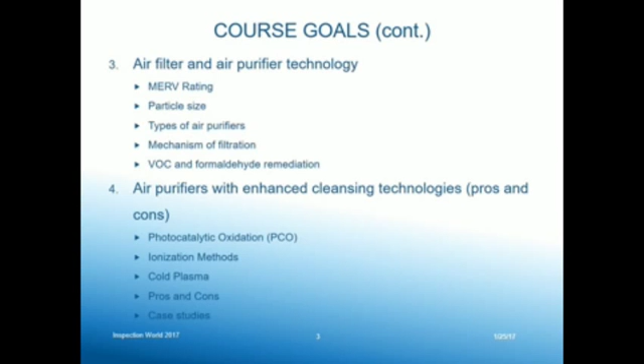Then I'll talk about different air purifiers and air purifier technology, air purifiers with enhanced cleansing technologies such as photocatalytic oxidation, and finally just a few words on shock treatment using ozone. We've got a couple of slides for that and general discussion, more than anything, and then a summary and conclusions.

So within hopefully two hours, you will have an opportunity to understand more about filtration from what I've gathered to know. I'm not an expert in the area by any means, but if you have something to share that would be beneficial to the audience, please do so - I'd be happy to hear those comments.

So what encompasses indoor air quality? Indoor air quality has many, many different aspects to it.

And the one thing that I'm not going to talk about today is radon remediation. It's a very important area, but that is definitely something handled by somebody who's pertinent in that area. But besides radon, first thing we talk about when you're in a room is, are you comfortable? Is it too hot or is it too humid? And so that's one of the aspects of comfort in an indoor air setting.

But then you think about other areas like molds. Are there molds present? Carbon monoxide and carbon dioxide. Typically, carbon monoxide has been under control because of the fact that we monitor for that. But carbon dioxide we less frequently monitor for, and we have some guidelines for CO2 emissions based on ASHRAE recommendations.

And then you talk about particulates, and that comes from lifestyle. You have skin cells, etc. Allergens that could be present that could be impacting indoor air quality. And then finally, particulates that could be present from building processes. And then finally, we have the VOCs, which pretty much is what you are breathing in the room on a normal basis without really even thinking about that. So every room has indoor VOCs, including this room here that we're in today.

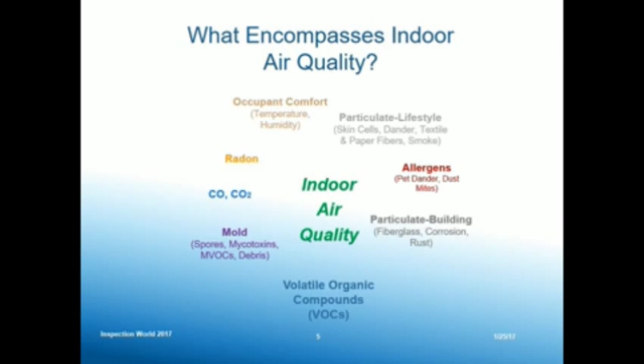So first of all, let's talk about some air quality basics. Indoor air is definitely contaminated with particulates, allergens, molds, and VOCs. In fact, the EPA indicated that indoor air pollution is one of the top 5 environmental issues and health risks that are present in the current day. And so it's something that we need to take seriously.

And so, the more we hear about things like Lumber Liquidators with formaldehyde issues, and where formaldehyde impacts our respiratory system, the more we want to know how we can handle these things and what our levels are. And so it becomes very important. And I think as we go through time here, with some of the assessments that come through, California being our strictest state, they come up with more and more guidelines for different VOCs. And I think there's going to be more and more interest in the future in commercial buildings and in homes for understanding what the VOCs are and how to remove them.

So particulate matter, allergens, tobacco smoke, they can all affect occupant health. And then again, we want to be able to have decent comfort levels for the occupants that are here. So we'll find out that source removal is actually the best method to remove VOCs if you can do that. But we'll get into that a little bit later.

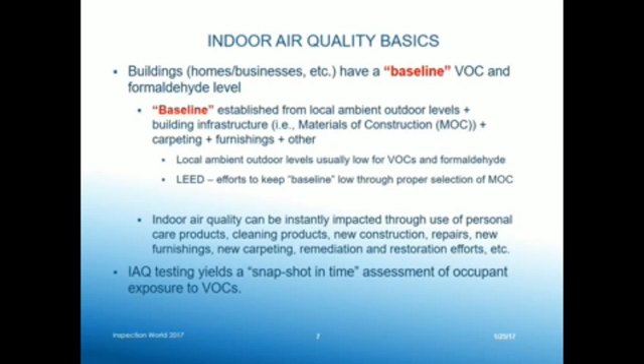So indoor air quality can be instantly impacted through the use of personal care products, cleaning products, new construction, repair products, etc. So IAQ testing yields a snapshot in time. And the reason for these changes can be that there have been more and more VOC issues, and a lot of it has to do with the fact that we have more airtight buildings that have been built, less leakage, and so when you have less leakage, you've bottled up what's inside as well. There are newer synthetic materials that may be off-gassing different VOCs. There's an article, I believe the author's name was Weschler.

He talked about VOCs over the last 50 years, and starting about 30 years ago is when you started having all these VOCs associated with plastic materials being present.

And we spend a lot more time indoors these days, especially younger people. When I was in grade school and high school, I was outside all the time, but now it's the video generation and everybody stays indoors, and it's safer to be indoors in many areas.

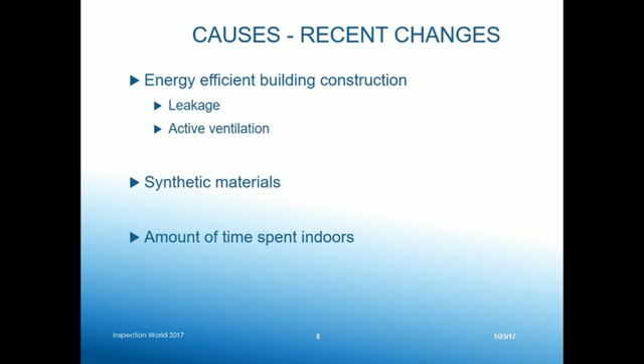And finally, there are increases in respiratory conditions. Visits to allergen doctors are at an all-time high based on our chemical sensitivity to what we're breathing and what we're being impacted by.

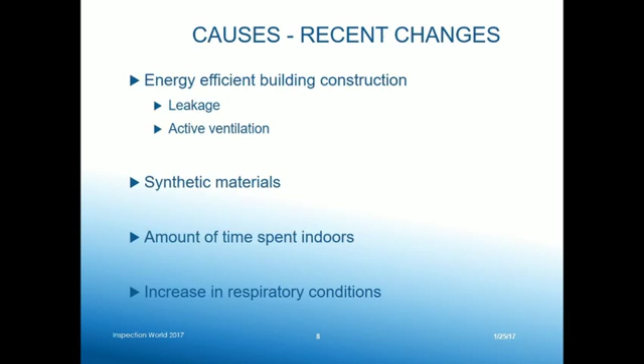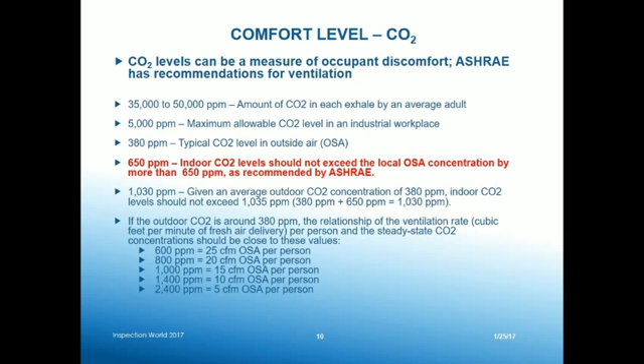So all of this is setting up the dialogue for why we would want to have filtration, keeping that in mind. Comfort levels: the outdoor air level is 380 ppm, and for indoor CO2 levels, I know many home inspectors use handheld monitors for this, and once you get above a certain level, you need to really consider ventilation issues. So I'm not going to speak any more on that.

But TVOC is a general indicator that we typically look at for indoor air comfort as well. The green guideline is to have less than 500 nanograms per liter of your TVOC. And then you have individual compounds that are in there.

The problem is, for homes especially, there are no TVOC guidelines. We generally try to follow, for instance, LEED guidelines, but those are mainly for commercial buildings that are being built. You can have a green home, and they do pretty much use those same kind of standards, but there's really not an actual U.S. standard for what your home has to be. There's no regulation for it whatsoever.

So as far as the methods go, there are many methods for getting a TVOC, and I know many people use handheld monitors, and then also there are air testing methods used by different analytical testing method companies.

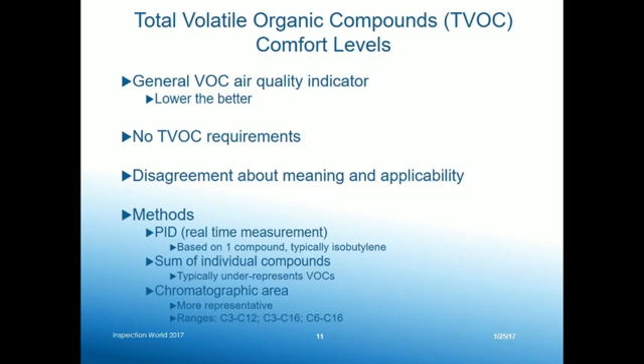So when you think about the TVOC guidelines, the general comfort range - Mølhave is a Danish scientist who studied VOCs and indoor air quality, and he established that you're generally comfortable if it's less than 200 nanograms per liter, which is kind of low.

So typically, when we think about comfort levels, we think of a green building or a green home. You should be comfortable at less than 500. And then, in general, you should be okay between 200 and 3,000 nanograms per liter, but there are some elevated VOCs that could cause you problems.

So if you're in that range, and let's say you just had some plastic lined pipe put into your home, well, the tetrahydrofuran (THF) from the PVC cement is going to be fairly high in your home. That's a respiratory distressor. So you might have some issues of discomfort based on a new application of building products.

Once you get above 25,000 nanograms per liter, though, you're kind of in a toxic range. Even though OSHA levels are still hundreds of times higher than that, you don't want that kind of a level of TVOC in your home or in your business. So things start becoming very uncomfortable for people.

300 nanograms per liter can be reasonably achievable, but again, we've found that the average home, based on all the different habits we have with personal care products, alcohol, those wipes you use for hand sanitizing, etc., from 8,000 homes, averages about 1,900 nanograms per liter.

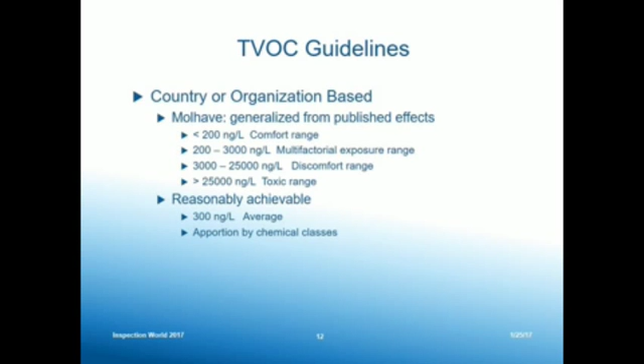And then again, I mentioned the green building being 500 nanograms per liter of what people are trying to achieve, with formaldehyde levels less than 37 nanograms per liter.

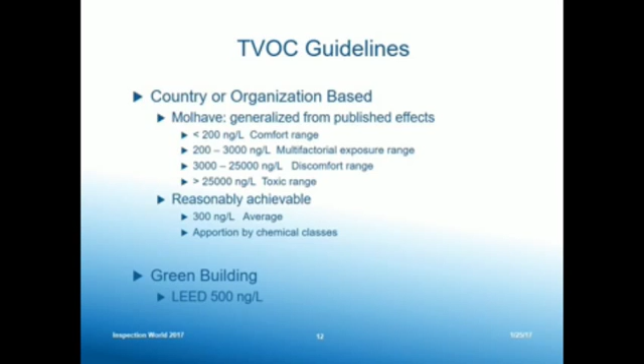So what are the sources? Well, for buildings, it's the building materials, the wood products used. Paints and coatings are very high. They take a while to decay.

There's this misconception that low VOC and no VOC paints don't have VOCs. Well, that's just the official federal government definition of a VOC - any organic compound that will interact with the outside atmosphere to create products detrimental to the ozone layer and environment. This includes things like xylenes and toluene. So what paint manufacturers do is replace those with glycol and glycol ether materials that are lower in vaporization characteristics, but they take a lot longer to off-gas. They're still considered VOCs, just not under the federal government's VOC definition. So we find that quite a bit.

We also have adhesives, mastics, and cements used in building products and roofing materials, and these can remain for years and slowly off-gas over time.

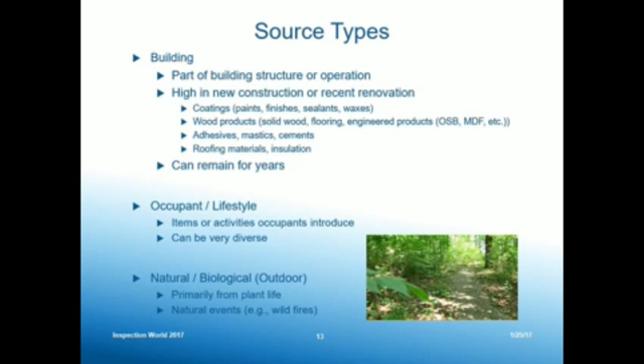And then we have occupant lifestyle, and then outdoor sources. Outdoor isn't much of a contribution unless you're in an area with a lot of spraying. We typically see issues with spraying outdoors around your base foundation, with the fuel carrier coming in through the windows, so it can become a problem. You can also have VOCs from wildfires.

As I mentioned earlier, we have baselines, and that baseline can be elevated by your lifestyle. You could put in mothballs or moth crystals for pests, and those are also used in urinal cakes in restrooms and bathrooms. Then there's paint and all kinds of coatings that come on new furniture. Kerosene, diesel, and fuel oil - if you have an attached garage with those vessels, they're going to creep into the home as well. So in general, there's a lot that can come into your home without you even being aware.

When you go to the gas station and then go home, you've just introduced gasoline vapors from your clothing into the indoor air. Especially as a home inspector, if you go take a test, make sure you haven't come from a gas station first, because you could be contributing to the homeowner's VOC test with gasoline vapors from your clothing. So be very careful about what you carry in. It's kind of like what Jeff May was saying yesterday - don't look in the attic or basement first when looking for mold, because you'll get some on your clothing that could then contribute to the indoor environment in the main room.

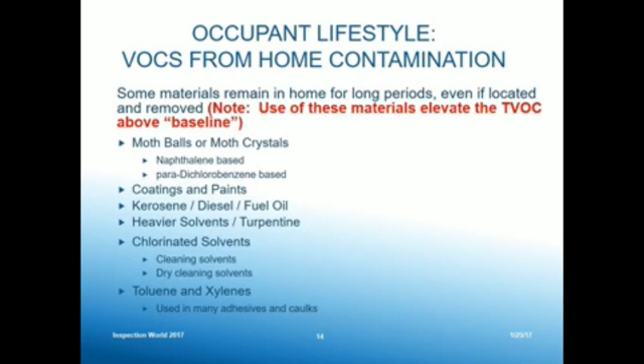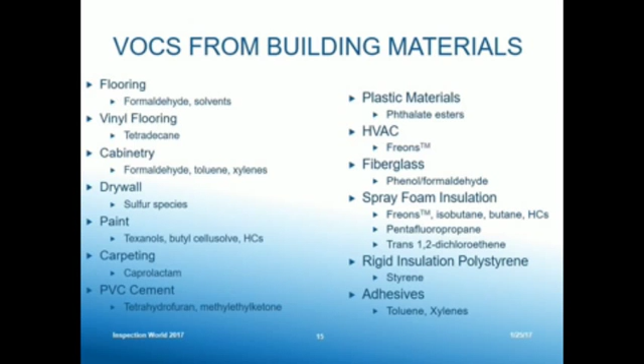And then finally - I'm not going to exhaustively go through this - but this is just a variety of different VOCs that can come from different materials of construction, from building products that are used. So every time you do a renovation in your home, you're introducing a whole new level of VOCs.

And then there's formaldehyde. Formaldehyde comes from any kind of wood. If you send a sample to be analyzed for formaldehyde, you're going to get formaldehyde from it - doesn't matter what kind of wood you have. It's going to produce some level of formaldehyde if you heat it up to, say, 50 degrees C. Formaldehyde naturally comes from cellulose degradation, and it's in the wood. It slowly off-gasses over time, and can off-gas differently in different temperature and humidity conditions. So formaldehyde is always there.

But it's even worse when you have poor materials of construction from other countries, for instance, that use particle board for cabinetry inside. It looks really nice on the outside, but they use cheap particle board on the inside, or oriented strand board, known as OSB. So plywood contains formaldehyde, but outdoor levels for formaldehyde are 5 to 15 nanograms per liter depending on where you live. NIOSH set a limit of 20 nanograms per liter as what you should be exposed to. Well, your home infrastructure is going to add more than that to the already outside air of 5 to 15. So we find that a normal home has an average of about 50 to 70 nanograms per liter of formaldehyde already there. And when you put in flooring that contains wood, adhesives, etc., you're going to add to that.

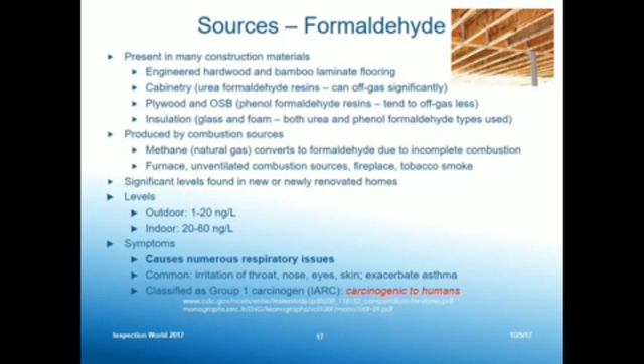And one other source of VOCs that a lot of people don't think about is vapor intrusion, which comes from contaminated soil due to spillage or from past industries that were in that area that leaked into the ground, and then that's now coming up through people's foundations into the home. So something to always keep in mind. Know the area that you work in, whether or not there are any of these locations where there could be an issue involving soil vapor intrusion.

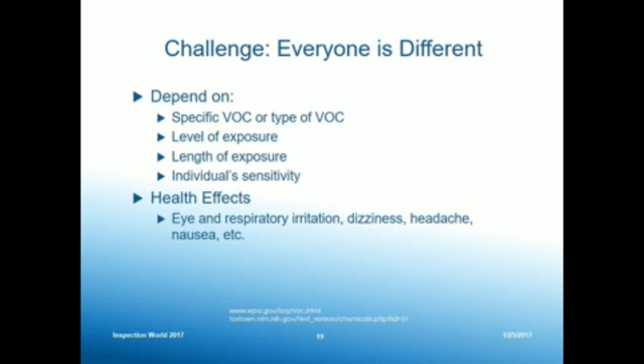So it's a challenge to everyone, though, and health effects can vary from person to person. Odor thresholds vary from person to person, but it all deals with what we're breathing on the inside. But other than VOCs, we also deal with these other areas I mentioned earlier. So just briefly, I'm going to touch on particulates, which include dust, dander, and pollen, because we have to worry about how we're going to deal with that with filtration as well.

So what is the concern with particulate matter? It's microscopic, and the fine particulate matter you sometimes hear referred to as PM, particulate matter. And it's the fine material, 2.5 microns and smaller, that causes our biggest concern, because those particles can embed deep in your lungs when you breathe. And that's the stuff you really need to worry about. That's not coming back out right away.

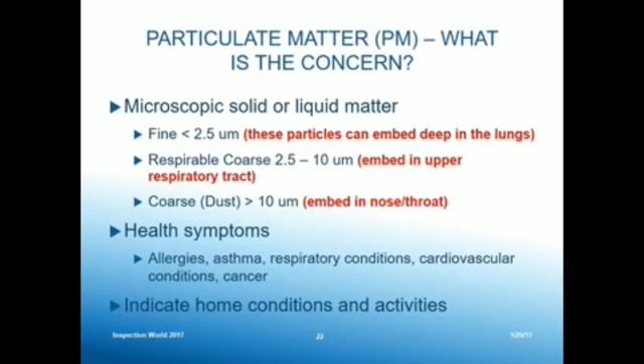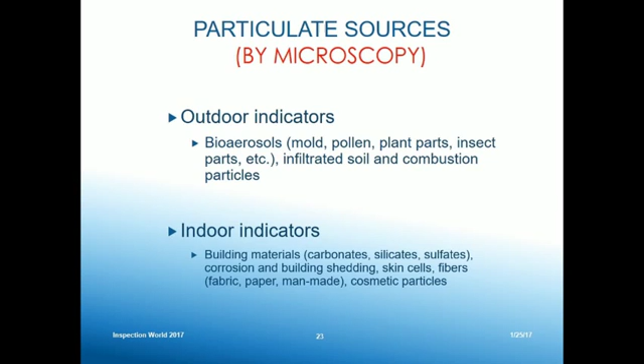So we have outdoor indicators, and most people refer to a microscopist for looking at particulate matter. The outdoor indicators include bioaerosols, which include mold, pollen, plant parts, insect parts, and we also worry about infiltrated soil and combustion particles. Whereas indoor indicators are from building materials such as carbonates, silicates, sulfates, skin cells from people, and then fibers, dust, and dander from pets, cats and dogs. And then these are, again, a couple of examples of the, yes.

Oh, do you mind using the microphone? I'm sorry. Thank you.

Besides the issue of the dander with the pets, we also have the clumping cat litter and things of that nature. What are the gases off of that from the clumping, or from the fact that you can't smell the cat pan anymore? Is that a concern, or what contribution does that make? Yeah, urine odor, especially cat odor, is a really hard thing to identify in a mass spectrometer, for instance, because it doesn't like to go through a GC column very well. So we have an issue with that.

But for some reason in our home we have our cat litter boxes right by the furnace. So it's kind of ridiculous. But you do get the dust buildup. I don't notice the odor as much because I usually try to keep it clean every day. But definitely you have a dust buildup, and when I look at that dust, I think it looks like it's less than 2.5 micron when it's being emitted. So to me, it's an issue of going through the home if you have it real close to the furnace, especially. This particulate matter could go through. But otherwise, I haven't heard any health issues associated with the cat litter, other than the fact that I know the dust is there.

Have you heard any issues? Okay, and he replied no, that's why he was asking. So if anybody else has any further information on that, feel free to share it, please.

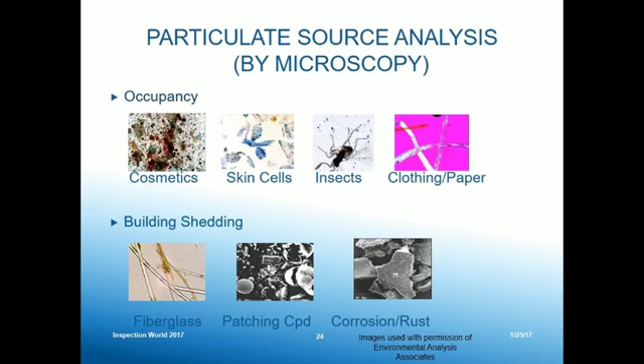Thanks. All right, thanks, Shannon.

And then we have microbial sources of VOC, or not VOCs, but microbial sources. These are single living organisms, viruses, bacteria, molds, and these can travel throughout the air, a lot of times on air particles or particulate matter. And sometimes just a simple sneeze can carry viruses a long way. So it's something to be aware of as far as microbial. So again, all these will be talked about when we talk about the air filtration processes.

And the concern for mold, of course, is potential health effects. And Jeff May yesterday indicated that some molds indoors will cause damage to your materials of construction and others won't. I'm not going to go into details on which will and which won't. I think his slides are available online. And there's no real practical way to eliminate all molds from the indoor environment, though, because molds are prevalent outside.

Usually they're not as prevalent in the winter and when it's cold, but as Jeff pointed out yesterday, you can grow mold in your refrigerator on food. So molds still grow in the cold. So you just have to be aware of that. But moisture control is the key. For mold to grow, you need nutrient, moisture, and temperature, and that's the way a mold will grow. So if you can control the moisture and then the temperature, then you're doing well on trying to at least control the mold growth. And there's no official limits for mold or mold spores.

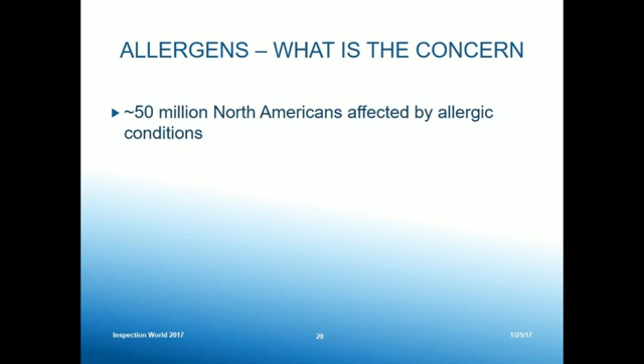For allergens, it affects more than 50 million Americans every year, and it's getting worse. It's an immune system overreaction to certain substances. A lot of people are now chemically reactive, so they're more VOC reactive than they are to any other type of allergen. And you can get a chemical sensitivity immediately from some adhesives that will then carry over to other types of VOCs that are similar in nature. It can be a very severe problem with regard to essentially the human condition.

And then we have allergens like dust, ragweed, pollen, etc. that we can have present. And again, it's on dust, so if there's dust in the home and that gets swept up through air movement into the environment, it can be very costly for some people. I've sat there at a kitchen table before with a really strong sunbeam coming in, and you just wipe your hand across the table and you can see the particles floating up into the air through the sunbeam. So it's something that we all need to be aware of.

So now these are all the sources. So now we can start talking about the filtration process. At this point in time, does anybody have any questions with regard to the VOCs, the sources of these allergens, or anything like that? All right, I will carry on then.

So again, the best possible thing that you can do is remove the source, if that's possible. If you can remove the source, then you've eliminated the problem. But in general, that usually ends up not being a practical thing. You're not going to remove the walls from your home to get rid of paint and coatings VOCs. You just can't do that. It's not practical. Now, you can use the lowest VOC type of paint possible, and that will help eliminate or reduce the amount of materials you have, but there's really no way to remove it all sometimes.

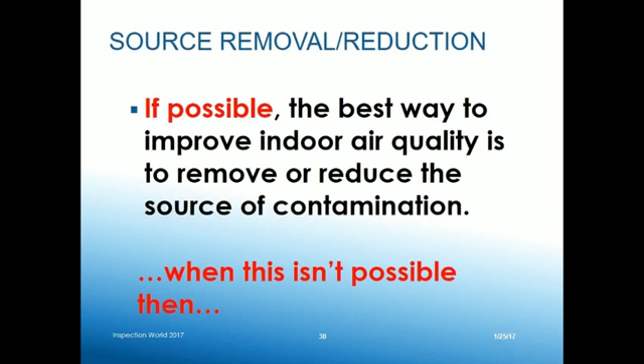When this isn't possible, then the next best thing would be to improve ventilation and add some fresh outdoor air. That's not always practical either. It may be very cold in your region, or it may be very dirty air in your region, and you don't want to bring in fresh air from outside. But that is a good way to help at least mix up the VOCs in your home with fresh air and dilute the effect of those VOCs on you or the occupants of that home.

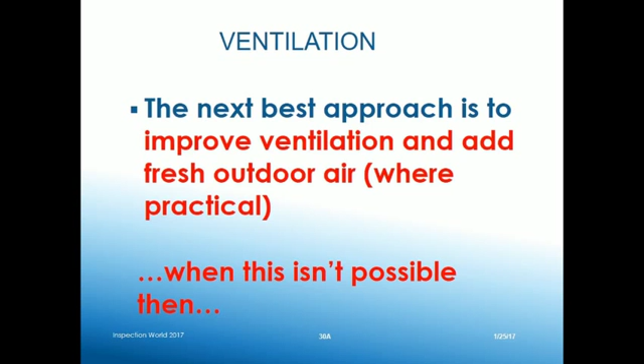When this isn't possible, that's when we start turning to looking at filtration and air cleansing. Okay? So what we look at in this particular portion of the talk are filtration types. What type of filter could be appropriate for different particle sizes? How can you filter VOCs? And finally, what other types of air cleansing technology are available?

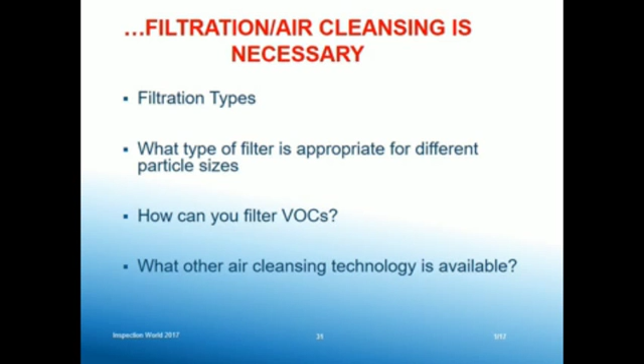So when we improve indoor air quality, again, I just mentioned the source removal, reduction, ventilation improvements. But then we're going to talk about the air cleaners and air cleansing. So air cleaners can be installed in the HVAC for whole house conditioning, which can run anywhere from the $2,000 to $10,000 range or higher, depending on the size of the home or business. And in general, this talk is more for home ventilation, because commercial ventilation has a whole different concept that uses similar principles.

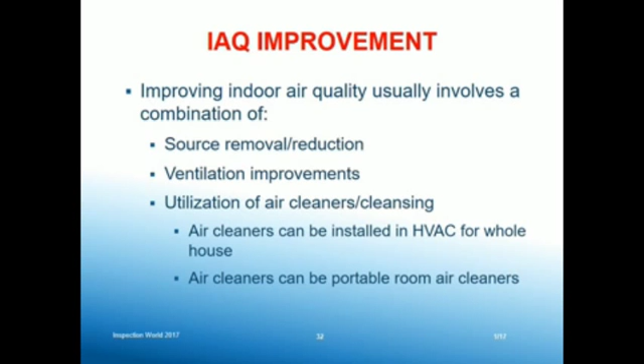And then air cleaners can also be portable room air cleaners. And I recommend portable room air cleaners a lot for people, especially when they're in their bedrooms 8 hours a night, and that's where their problem occurs. Look, put in a room air cleaner that can help to reduce the VOCs that are present, or allergens, or whatever it is that's causing the problems for that individual.

So regarding air cleaners, they have primary and secondary impact. And what I mean by this is that the primary is that you are potentially reducing the contaminant concentration, okay? But secondarily, what a lot of people don't realize is that you're also using a lot of energy in the process. So as far as the overall energy use, and how are we affecting our environment? You're improving your condition on the inside, but you're also using more energy. Then you also have possible byproduct production from the air filter, air cleaner that you're using, and that is what I'll discuss later. But that's just something to keep in mind.

Another thing, there's a common misconception that you will always improve your air quality using an air cleaner. And that would be the case especially when you first put a filter in, you're typically improving your air. But it turns out that if you let the filter get clogged up and you allow that to continue to run, then you're going to reduce airflow. You're also going to reduce the turnover of VOCs in your home, or the turnover of fresh air in your home, and you're going to impact your indoor air in a negative way. So you have to be careful about thinking that an air cleaner is automatically going to help. It sometimes, depending on how you handle it, could be a deterrent.

And depending on the air cleaner that you use, VOCs may not be removed, because some of the basics that we see in the stores don't remove VOCs. And then from the ones that we do use that do remove VOCs, we have to be careful about the secondary byproducts that are potentially returned into the air from the cleansing technology.

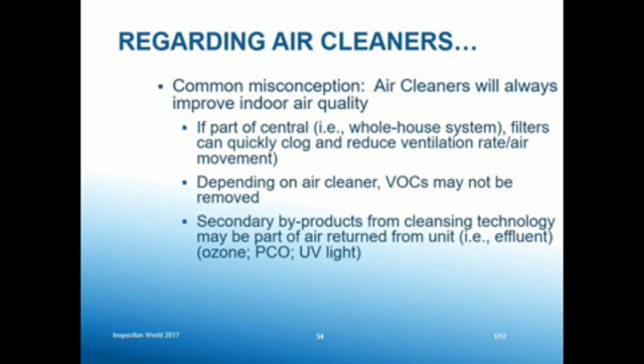And by the way, just so you know, in preparing this talk, I did not use any jargon from any vendor. I did not use any names of any vendor, as far as I can tell. And I've tried to be very objective about what I'm discussing here with regard to that. So I'm not really making negative statements about any one individual. I'm just saying these are some of the potential pitfalls or the advantages and disadvantages of a particular type of air filter or technology, just so you're aware. Just trying to keep it as scientifically objective as possible.

So there are two types of air cleaners that can remove particulate matter, but these do not deal with VOCs. But a lot of what we have in homes right now are mechanical air filters, such as HEPA. HEPA stands for High Efficiency Particulate Arrestance. So you're trying to arrest particulates from your home air. These are limited by particle size, and we'll see that information a little bit later.

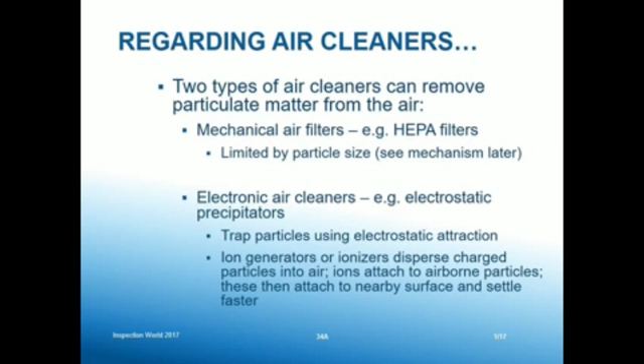But electronic air cleaners, such as electrostatic precipitators, they sort of charge the air, so the particulates are charged, and then they get captured by an electrostatic filter, or they essentially fall onto a surface and get removed from the air. When they're removed from the air by falling onto a surface, then you need to make sure that you're not mixing that dust up by walking through with air movement. So they trap particles using electrostatic attraction, or they produce ions which attach to airborne particles, which makes them fall out and settle faster. But neither of these types of air cleaners can remove VOCs, which have much smaller molecular sizes. So we're going to talk a little bit about that here in a minute.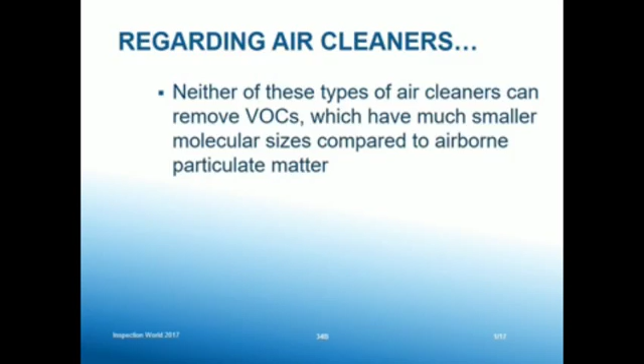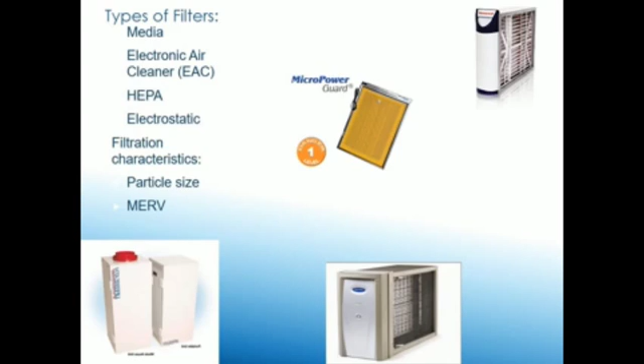And then we look at what's known as the MERV index for an air cleaner. The MERV index is a rating of how well it performs with removing particulate. It stands for minimum efficiency rating value. And the higher the MERV rating is, which goes up to a number of 20, the better the effectiveness of the air filter is, and the greater the number of dollars you spend on it.

So most indoor air quality for homes is 13 or below, but the ones that are 20 are for clean rooms and hospitals and laboratories where they need to have a clean room, and you wouldn't use those for your home anyway, but that's what that is. They will arrest contaminants less than 0.3 micron in particle size.

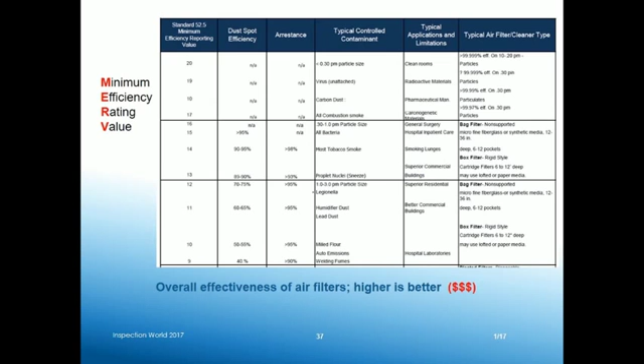When you get into the range of 16, you're talking about 0.3 to 1 micron particle size. And then 12 is 1 to 3 micron PM particle size. And then it goes all the way down to 1, and this is using carpet fibers, which is not very effective at all at cleaning air.

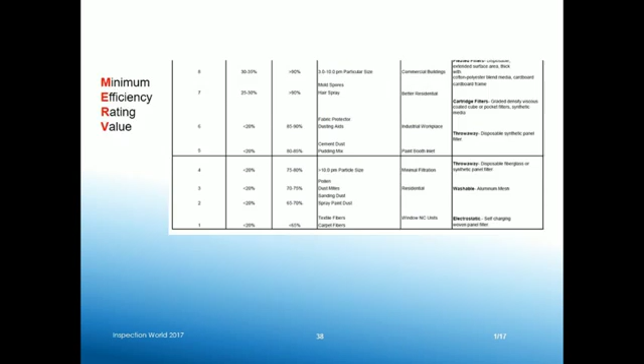So the ones that are most commonly used in homes are from 6 to 13. And you can see the superior ones for residential homes are about 13 MERV rating, and these are pleated filters. They do not capture VOCs, but they're very effective in the particle size of 1 to 3 PM. So they do capture part of that respirable PM that we talked about being dangerous to your lungs, but anything below 1 micron, it's not going to capture.

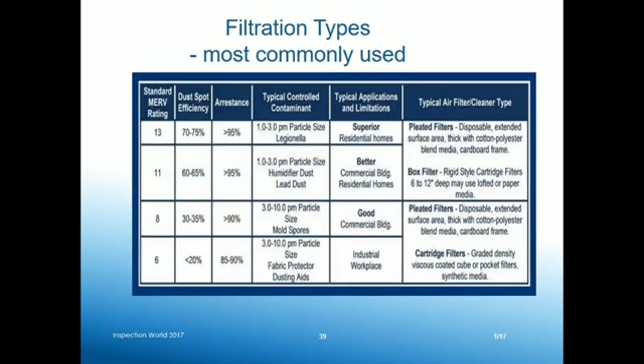So the cost, I looked up some costs today from nationwide building product stores, such as Home Depot, Lowe's, etc. The allergen reduction furnace filters, which are the higher rated ones for homes, have a MERV rating of 12. They're electrostatic, and I'll explain electrostatic in a few minutes. They have a 3-month lifetime, and they range in price from $25 to $40 apiece. So they're on the expensive end for these types of filters.

And then the basic pleated MERV rating of 5 is $4 and up. And that's pretty much what's in my furnace at home, I hate to say. So anyway, these are just the common filter types.

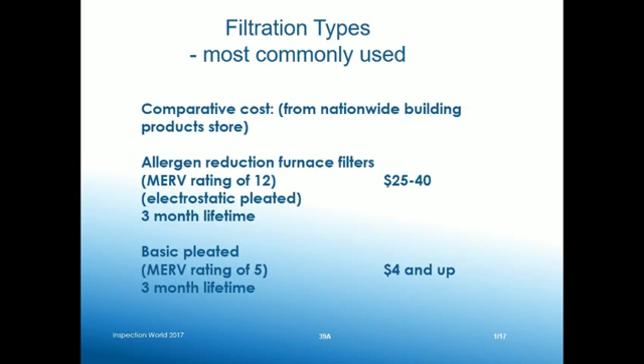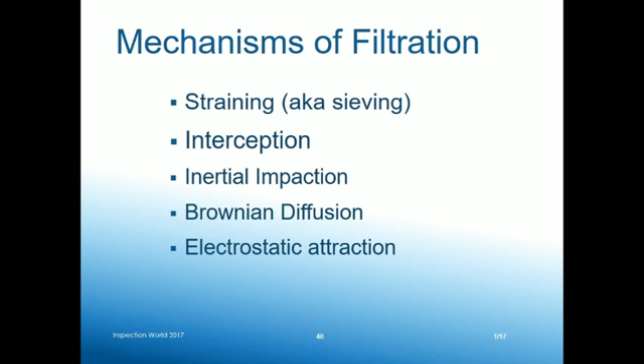And there are different methods for filtration. You would think that the only thing that happens in a filter is that the particulate matter comes in and gets intercepted where it can't get through the fiber, but that's not always the case. So straining occurs for particles that are larger than the distance between fibers, and this is what we normally think of when we think about air filters. There's no choice but to be stopped, and that looks like this.

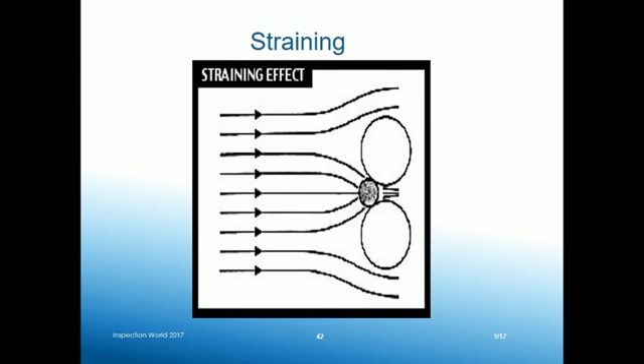Here's the air flowing in. Here are 2 fibers. The particle's larger than the distance between the 2 fibers, and it gets stopped. Well, if you have this happen often enough, you're going to clog up your filter eventually. So that's why you need to change your filters. And that looks like this when you're doing the straining. It just stops. It's there.

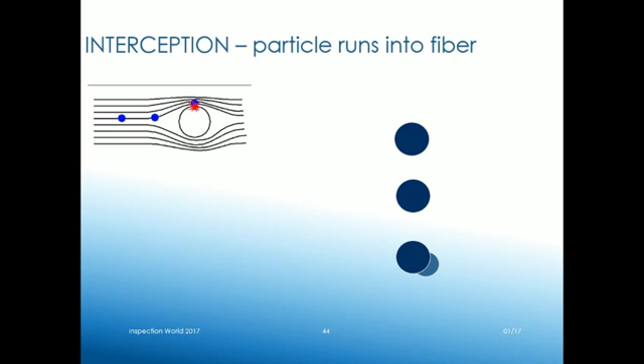And then with interception, it runs right into the fiber, and the picture up here shows it going around the fiber, and it kind of collides with it and hangs onto it. A lot of times that hanging onto it is due to maybe an electrostatic attraction between the particle and the fiber as well. And then we have inertial impaction, which just runs straight into a fiber, and that's it.

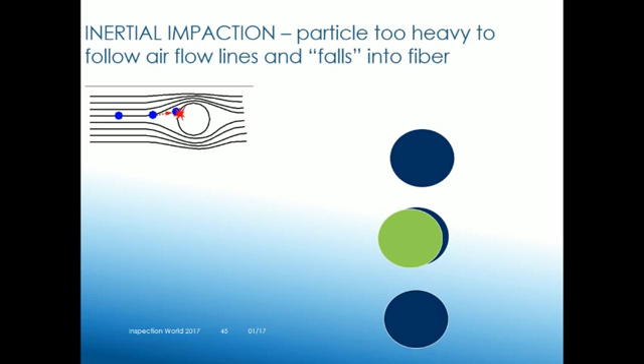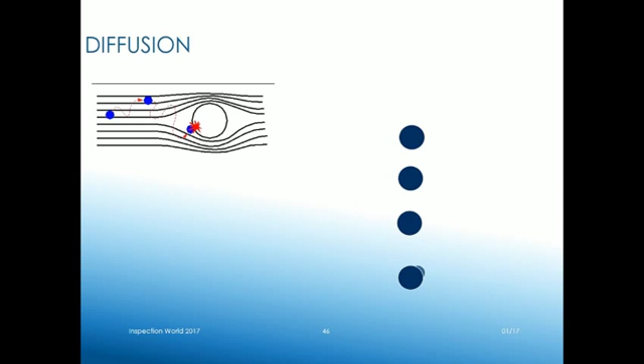Or because it's so heavy, as it's trying to go around the fiber, it just runs right into it—that's inertial impaction. And then finally, there's diffusion, which occurs usually with smaller molecules that go around and then hit a particle or fiber and stick to it. So this is a summary of those: sieving, interception, inertial impaction, and diffusion.

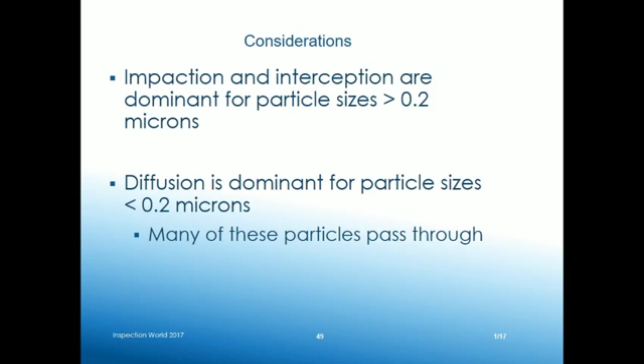Usually for anything greater than 0.2 microns or bigger, impaction and interception are the prevalent mechanisms. But below that, diffusion is dominant. In the process of diffusion, many particles pass through, and the filter is ineffective at capturing them. So in general, this would be an example of a single stage—a single-stage filter.

So the dirty air comes in on the left-hand side, through this pre-filter, which is normally disposable, and then you go through a fabric filter cover, which is also disposable, and then it goes through the HEPA filter. Only a few of the air particles, the air molecules, come through, and the HEPA filters themselves get clogged over time and have to be replaced. But that would be a HEPA filter that's only taking care of particulate matter for the most part.

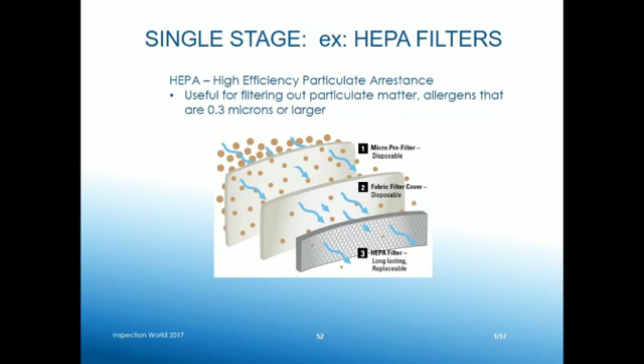And then we have—sorry, my clicker—the air filter with electrostatic filter. The way this works is that unfiltered air is passed through a pre-filter, which you can remove like any other, capturing the big stuff first. Then there's an ionization section where it positively charges the particles. Those positively charged particles are then captured on collector plates, and the collector plates have to be cleaned frequently to make this work effectively.

But as the collector plates fill up, when the air passes through the final filter, you get clean air coming out the other end. These are all still considered single-stage type filters, dealing only with particulate matter. This particular one, with charging, can help deal with allergens and bacterial materials because it helps remove those from the environment.

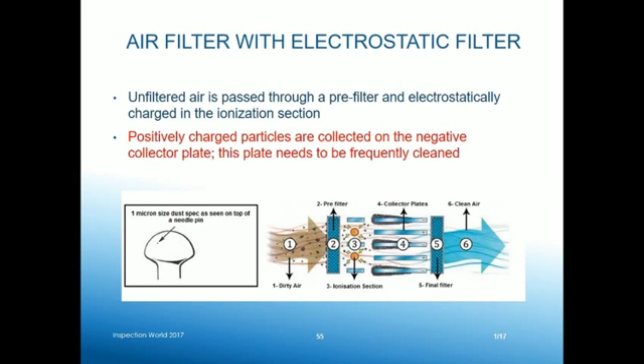But what about VOC and formaldehyde removal? What do we do about that? With VOCs and formaldehyde, the gaseous pollutants require that some kind of adsorbent material be present—whether it's activated carbon or some other adsorbent material, it has to be present for this to work. It's difficult to compare different adsorbents because guidelines don't yet exist for these types of VOCs. The ASHRAE Committee 145 is developing guidelines for HVAC installed systems, but not for room cleaners yet—so they're working on that.

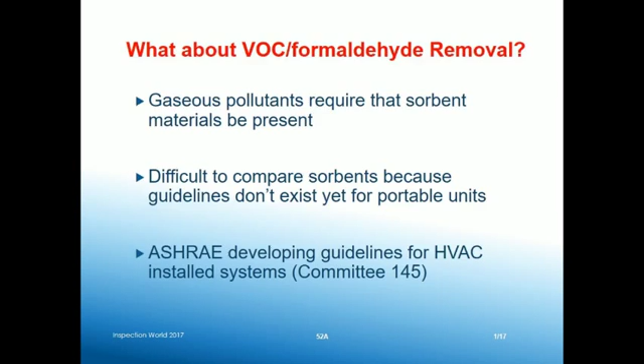So the one-stage method of filtration we talked about dealt with particulate matter, but for two-stage, you want both your first stage and then an activated carbon filter or some adsorbent material to remove particulate matter plus some VOC remediation. It comes down to understanding how that VOC remediation works. In the enhanced two-stage—that's on another slide later—so that's one way of dealing with VOCs.

And then what about airborne viruses, bacteria, and molds? How can you remove those? That's the enhanced two-stage, which includes everything we've already talked about, plus some kind of cleansing technology, whether it be electrostatic, UV (ultraviolet), ionization, photocatalytic oxidation (also known as PCO), ozone, or cold plasma. Those types of technologies currently exist for helping to remove VOCs, bacteria, molds, etc.

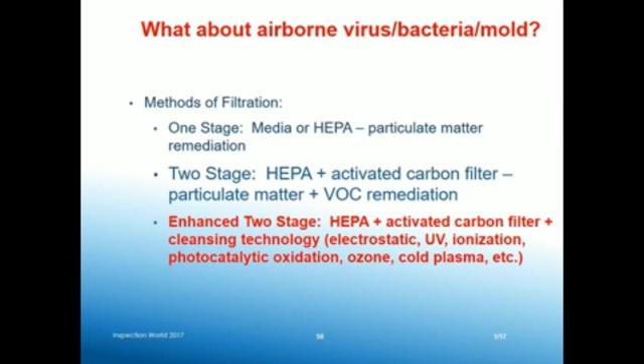So these are different air cleaner types, and I just highlighted the media filtration is what we've already talked about. And then we're right now talking about adsorbents, which involve organic and inorganic gas phase contaminants. And then the photocatalytic and electronic air cleaners and ozone we'll talk about a little bit later.

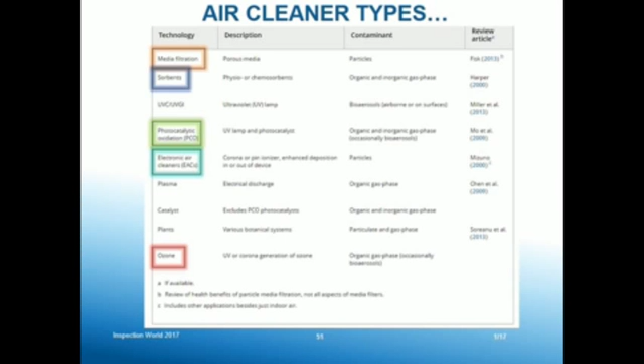But the thing to keep in mind is that all of these different types of air cleaners are currently available on the market. And I always say, just make sure that everybody understands what it is you're buying before you buy it, and understand what the potential advantages and disadvantages and the pitfalls are for these.

So with single-stage filters, we talked about the fact that we cannot capture VOCs, and so that's why we're now talking about VOC adsorbents. But I put up one more particulate size. Here's 1,000 up here, and here's 0.01 for some of our particulate matter. And formaldehyde has a diameter that's 100 times less than the smallest particle on that scale. So formaldehyde has a diameter of 0.0001 micrometer, and that's the smallest organic molecule that we know.

And so then there are VOCs in the range from 0.0001 up through probably 0.01 as far as what we capture on VOCs. So VOCs typically are too small in diameter to be trapped. They don't get trapped by electrostatic attraction. They need to have an adsorbent present for that to work. But again, remember, the best thing is source reduction and source removal.

If you understand what the source is, if there's a gas can in the garage, you build a shed outside and you get rid of the gas can from the garage and you just remove the source from your indoor air. This is if you can't remove it and you want to help your indoor air quality for people that you are dealing with in your home inspections. That's why you would use a carbon adsorbent filter for that.

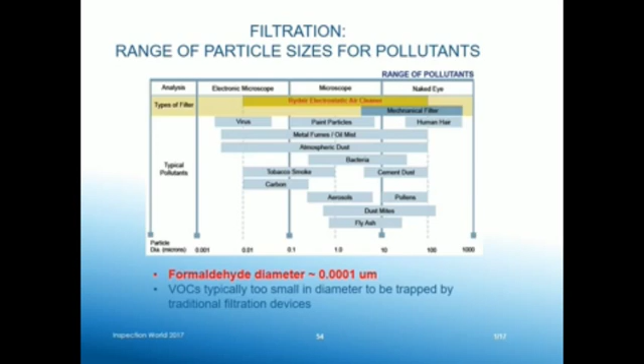Sorry, this thing is like moving on me a lot.

So for VOC removal effectiveness, if air is screaming through your filter too fast, then you're not going to effectively remove anything. So it depends on airflow rate, velocity through the adsorbent, and the concentration of the contaminants. If you have too high of a concentration, you're going to essentially use up the carbon bed adsorbent. These carbon bed adsorbents are a fairly thin layer, but some have been known to have as much as 600 square meters per gram of surface space.

Think about 600 square meters of surface space, because you're essentially capturing through all the little pores of the carbon, et cetera. So there's all this space available for adsorption. You just need to make sure that you're not letting it go too long or that you have too high a concentration of VOCs for it to be saturated immediately. And then you have to continually fix things. So carbon bed adsorbents are nice, but if you can't remove the source, you're just going to keep on replacing things to try to keep your air fresh on the inside.

It also depends on the total available surface of the adsorbent and the temperature and relative humidity of the gas stream. Anytime you increase the temperature in your home, you're going to increase off-gassing of VOCs from surfaces within the house. Higher humidity will sometimes help saturate the carbon bed adsorbent and also elevates the levels of formaldehyde in your home, because formaldehyde likes to interact with water and be carried through the home on the water.

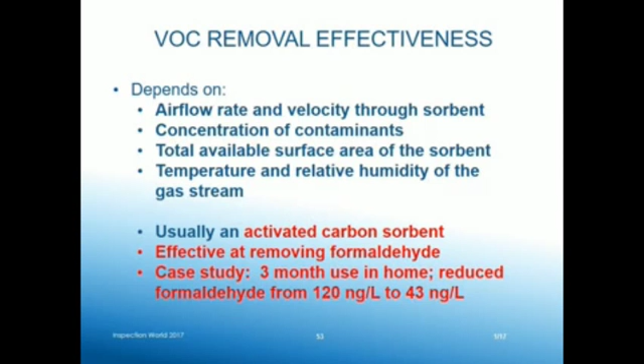Usually people use an activated carbon adsorbent, and it is effective at removing formaldehyde. We had a case study where there was a 3-month use of a simple air filter with a carbon bed adsorbent in a home, and their formaldehyde level reduced from 120 nanograms per liter to 43 nanograms per liter. They didn't really do a lot else, though they were careful about what they had in their home and may have done some remediation based on recommendations made. But in general, the air filter actually ended up working better than the remediation efforts they made.

The VOC removal mechanism either depends on adsorption, which is a physical process where the molecule is attracted to the carbon bed adsorbent, or it depends on chemisorption, where a chemical reaction occurs. Keeping it fairly simple, adsorption is a physical attraction of the gas or vapor molecules to a surface.

But because of the area of the carbon bed, it does have a limited capacity and requires frequent maintenance. So you need to make sure that if you've recommended a carbon bed adsorbent or some kind of filter to a homeowner, that they are keeping up with it and understand how to use it and how it works.

They also work better at lower temperature and humidity, because at higher temperature, not only do the surfaces off-gas in the house, but the carbon bed adsorbent will start off-gassing what it already collected. So if you collect at a certain temperature and suddenly it's 10 or 20 degrees higher, that carbon bed is going to start degassing what came onto it in the first place. That also happens if it gets saturated.

Other types of materials that are used include silica gel, activated alumina, zeolites, synthetic polymers, and porous clay minerals. So if you see any of these words on an air filter, that's generally consistent with that.

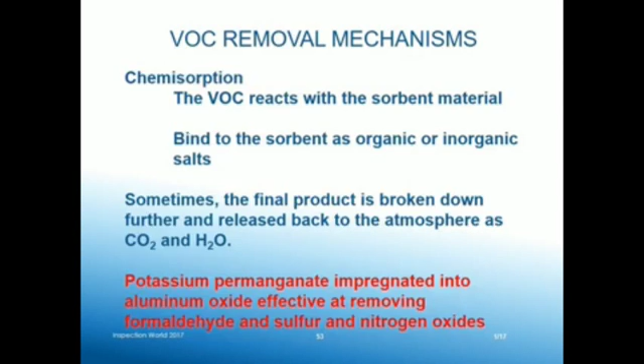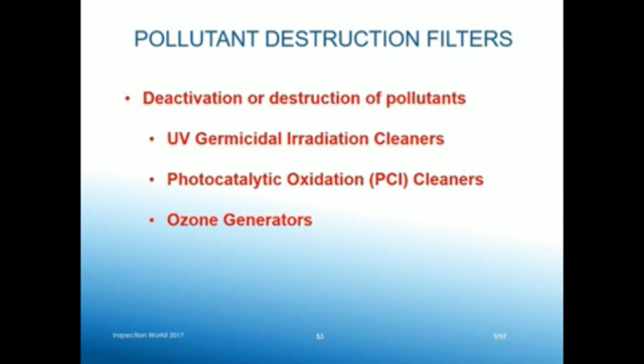Then you have the pollutant destruction filters—this is the third stage we were talking about. You have the VOC carbon removal, but you also have the potential for pollutant destruction, which is deactivation or destruction of pollutants. This could be either a UV germicidal irradiation cleaner that uses UV light—I'll discuss the pros and cons of that—and then photocatalytic oxidation, PCO cleaners, and ozone generators.

What is UV light? Well, when we think about light coming from the sun, we see essentially white light, which is a combination of all visible colors. But what we see is just a small component of actual light in general. Right now, we have light coming to our cell phones to tell us whether we have messages. Every cell phone has a different frequency, every TV station pushes out radio waves and television waves. Any radio station right now, we're receiving that light. So light is all around us, and the stronger the light, the more energetic it is.

When you think of the visible spectrum in the middle, you have violet all the way up through red and orange. The lights at the end are infrared, and these are the lights used to keep your food warm while it's waiting for other food to be ready. Those are your heat lamps. We have heat lamps in the garage to keep our rabbits warm.

Then you have ultraviolet light, which is UVA, UVB, UVC. Ultra means really, really violet, so you're down at the violet end, and there's UV. You see violet light when you go to a barber shop or salon, where combs are stored in a vessel with that light, killing bacteria that could be present on the combs that were just used on your head or someone else's. So this is UV light.

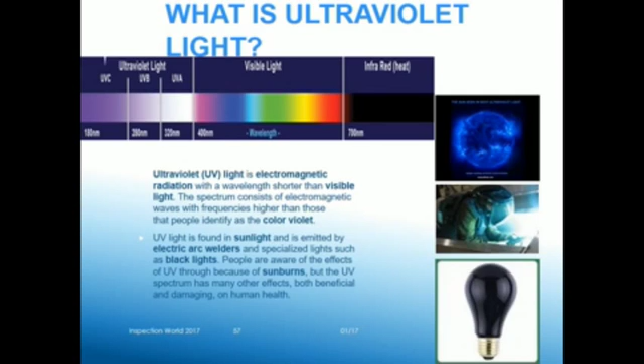UVA is black light—those are the lights you put in that make your white clothes glow. Suntan booths use UVB, and UVC is ultraviolet germicidal irradiation. UVC is typically what's used in air cleaners to help remove VOCs and other contaminants from the air.

UV light benefits: it helps limit mold and bacterial growth in the area in which it's being used—I emphasize, in the area in which it's being used. It limits growth on HVAC coils, which I'll show you in a minute with a very dramatic picture. It reduces maintenance costs since you're not dealing with dirty coils, and it reduces dirty sock syndrome from the air conditioning coils. It also reduces airborne contaminants. Those are some of the benefits.

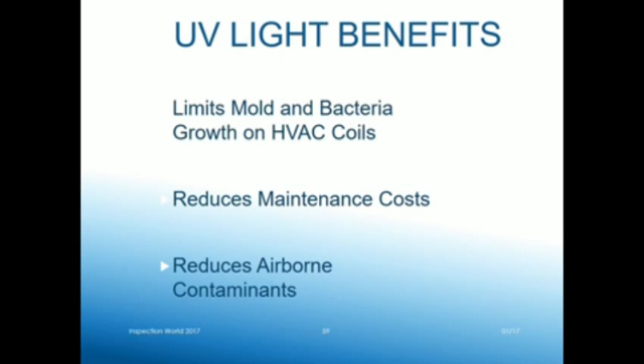Now, I say it reduces airborne contaminants with some caution, because it's not always very effective, depending on the amount of time the contaminant spends with the UV light. That's very important.

This is an example of a multi-stage air filter that uses all three types. The air comes in, goes through a pre-filter and a charcoal layer, which helps remove VOCs, and the true HEPA filter, which removes particulates. Then there's a UVC light—this one in particular has a catalyst, which I'll discuss later. The UV light helps remove airborne germs and decomposes some of the remaining molecules.

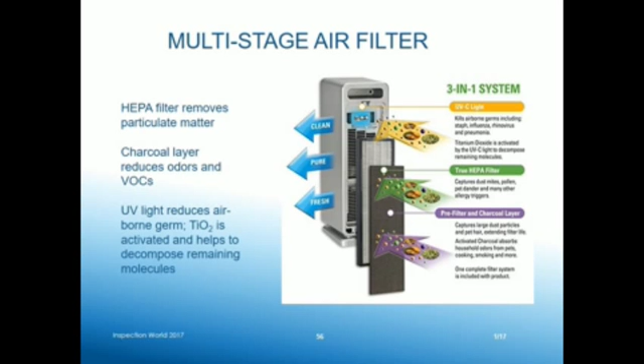This would be a room unit, which would run about $500 to $600 or more depending on where you get it. I noticed today that prices for these room air cleaners are all over the place—ranging from $90 up through $1,000, depending on the model and the reputation of the manufacturer. So I couldn't put together a good comparison cost list. The best thing, if you're recommending something like this to someone, is to do a Google search to find a supplier or manufacturer that looks like a good fit for that individual.

But it does not travel well. It's an inverse square law, but the key thing here is that UV energy times time equals kill. So if you don't have enough time for the kill, it's not going to work effectively. So if you have too high of an air movement, or if the air is going around the UV light without actually almost being in intimate contact with that UV light, it's not going to work effectively. And so it does not travel well.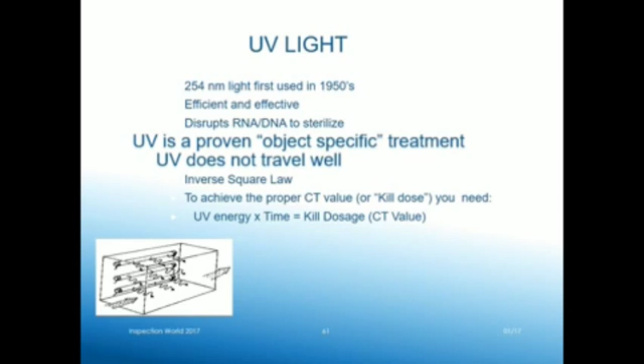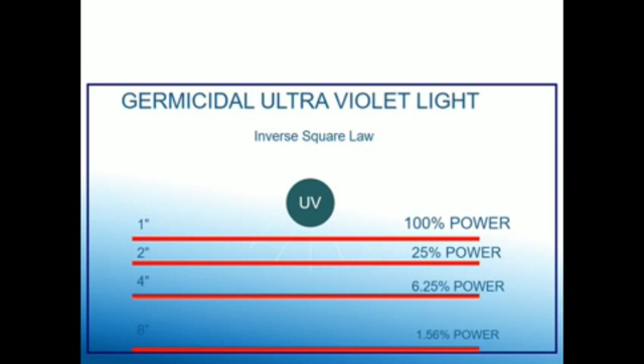And you can see here's the UV light here, and you have 100% power 1 inch from the source, but only 25% power 2 inches from the source, and it goes worse than that as you go out. So you have to make sure that the airflow is able to make intimate contact with that UV light to be able to have it work and then not be moving too fast. So whereas we said earlier that it was good at removing, that's only if you can actually maintain the time for it to do that.

So it does have sometimes limited effectiveness in destroying airborne viruses and bacteria, mainly due to that amount of time exposure to the UV light. So it's kind of a pro and con at the same time. It will help, but it doesn't necessarily remove everything. And it should be used with, but not in replacement of, other filtration devices. So you definitely want to make sure it's part of a system, not the only system. And then some mold and bacterial spores still require higher UV dosages and exposures, which would go down to that 180, I think it was called the oxidizing spectrum of the UV light.

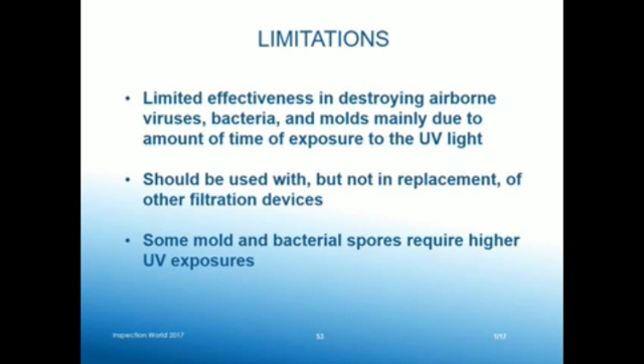And then we have photocatalytic oxidation. Photocatalytic oxidation is prevalent in some new air systems in the past 5 years or so. What you have is a UV lamp, and then a photocatalyst, which is known as titanium dioxide. That's used all the time. So the photocatalyst absorbs the UV light and forms strong oxidizing hydroxyl radicals that have this formula, OH, it's a radical formula. What these hydroxyl radicals do is they attack bacteria and pollutants and essentially help destroy them by releasing carbon dioxide and water out the other end.

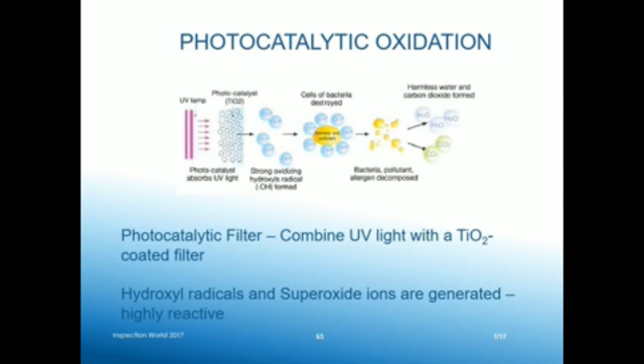Again, what can possibly happen, though, is sometimes the reaction doesn't go all the way to completion, and so you end up possibly getting some other VOCs in the effluent of the filter that could cause some problems to the indoor occupants. Again, it's just a matter of it could happen, and there are some things that don't work very well with this. But again, it's combining UV light with a titanium dioxide coated filter, and then these radicals are generated, and they're highly reactive to the bacteria and VOCs that are present as well.

They're designed to destroy gaseous pollutants by changing them into harmless products. But these also, again, they're designed to remove particulates, but the limitation is that they're ineffective at destroying gaseous pollutants in indoor air. So they'll do well on some of the larger particles that they have time to interact with, but they're not always foolproof in being able to get the VOCs as well. Some PCO units fail to destroy altogether, and they produce new indoor pollutants that could cause irritation of the eyes, throat, and nose. Example, formaldehyde formation, because it didn't go all the way down to CO2 plus water. So formaldehyde could come out as a side product.

And we have had issues where people have called in and said, "Hey, I just did some kind of a treatment in the home, and we're getting high readings on formaldehyde." And usually formaldehyde can be one of those VOCs that's due to incomplete combustion of whatever is happening. Also, you can get some HCl gas from chlorides that go through this. And when HCl gas gets into your lungs, it turns into hydrochloric acid, which is an irritant to your lungs as well. Typically, it's not at a really high level, but it still could impact the people who are in the home.

And then there are the air cleaners with ozone generation. The FDA requires that these types of units be limited to less than 50 parts per billion of ozone as they're being formed. So you can't put more into the room than that, because ozone is very destructive to lung tissue, etc. Ozone is also very destructive to anything that has a double bond in it, chemically speaking. So anything like a rubber gasket or any kind of materials of construction like paint on the walls can be impacted by ozone. And I'll talk about that a little bit later.

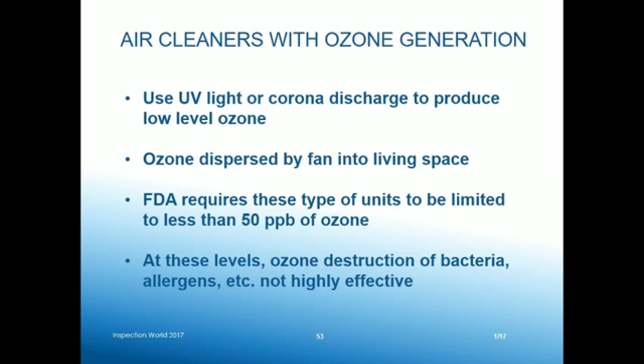Finally, there's another one known as a cold plasma treatment. This is where you use needle point ionization to break down gases with electron volt potential numbers below 12. So it uses an ionizer, and if it's an oxygenated material, typically those have values below 12 for the gases. Hydrocarbons sometimes are higher than that, so you're not going to remove things like gasoline vapors, but you can remove oxygenated materials from the environment. And these are attracted to airborne particles, and they're effectively removed by particulate filtration.

Tests are ongoing on all these types of devices, though. You can do a search on any of these types of filtration devices and find out. You'll get one set of information from the manufacturer, indicating all the good points, which is understandable. But then you also will have scientific studies done to try to help give the overall picture of whether or not it's good for that particular application.

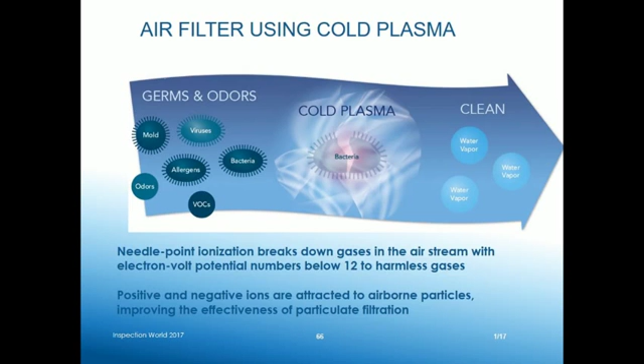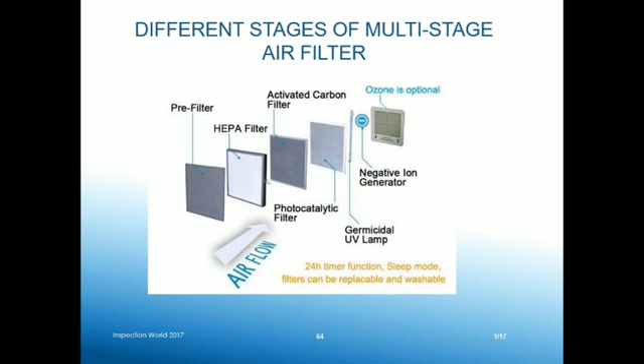So this kind of puts it all together. You have a pre-filter, a HEPA filter to help remove particulate matter, an activated carbon filter to help remove VOCs, and then a photocatalytic filter, which will hopefully help remove some of the airborne allergens, a germicidal UV lamp for the same thing, a negative ion generator, and then ozone is optional. So that's a fairly expensive looking device, if you ask me, but it combines everything, and hopefully at the very end nothing new has been added to the environment from it.

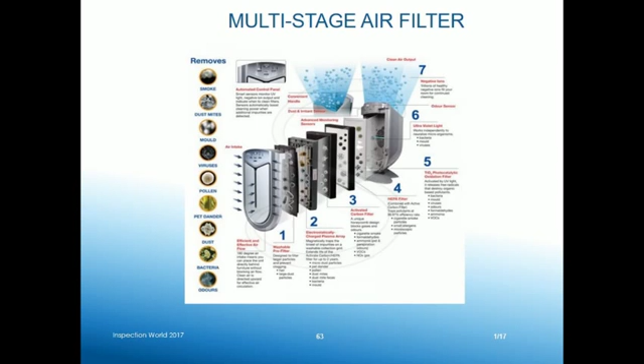And this is pretty much the same kind of thing, a multi-stage air filter, which goes through the same process I just talked about. So in comparison, for small room units, I couldn't find a set price. They were anywhere from $90 on up for good HEPA filters or filtration devices. But some of the room units are up to $500 when they have photocatalytic oxidation in them. I couldn't find anything up to $1,000, but I think they do exist. But most are available at building supply stores.

In conclusion about these destruction filters: buyer beware regarding potential hazards of use. Scientific evidence suggests that secondary products exist that can repollute indoor air, so you always have to be careful about what it is you're trying to take care of in the situation you're in. Know what you're buying and ask questions.

The last thing I want to talk about, just a couple slides here.

I know some people like to use ozonation to help remediate tobacco smoke or some kind of a pollutant. And I think that, in general, it has its points where it can be a good application. The thing that you need to really be aware of, though, is the secondary destruction that occurs with the use of an ozone machine. Typically, you're introducing 3500 milligrams per hour of ozone into a room, and some units go higher. Some people leave them in there for an entire day.

Just remember that you're going to chew up the walls that are there. Any kind of rubber or plastic material that's susceptible to reaction from ozone will be affected. And then you create formaldehyde, and you create secondary products like aldehydes in the process of doing this. Again, there might be some applications where it's really critical to remove something, and it might be useful for that, but I always caution people about the secondary byproducts and the fact that formaldehyde will be formed from that process.

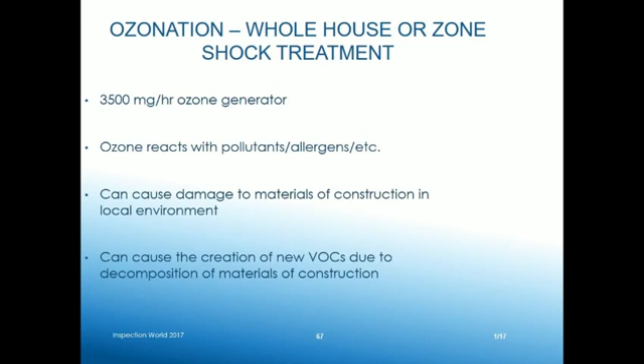And then there's a newer thing called chlorine dioxide, which supposedly is less reactive than ozone or chlorine, and it helps to remove odors and microbials. And there's also, I think, a hydrogen peroxide type treatment for especially industrial applications like food applications. I don't have a lot of information on chlorine dioxide. It doesn't form as severe secondary reaction products as ozone, but I'm not exactly sure how it would affect the indoor occupants after application of it.

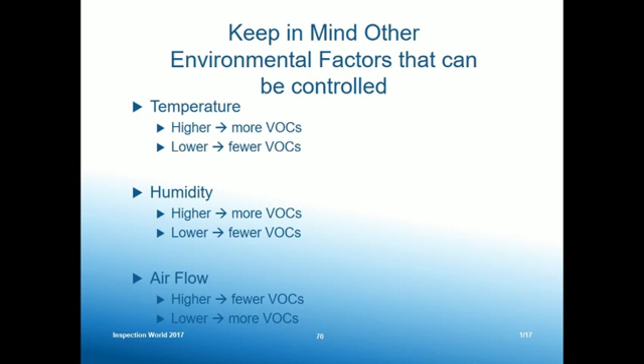So keep in mind that other environmental factors can be controlled when you're doing work for people. The higher the temperature, the more VOCs they're going to get from off-gassing, so they want to maintain a good temperature in their home. Humidity: the higher the humidity, if you have a dehumidifier, that would be great. That's a good addition to a home to help reduce the levels of formaldehyde in your home, especially with both temperature and humidity. And then the airflow. The higher the airflow, the more you're diluting the VOCs in the environment of that home.

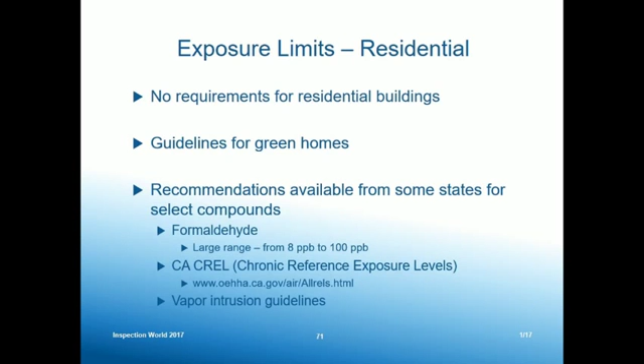And for exposure limits, there aren't any exposure limits for residential. A lot of states, though, are looking at recommendations from California for some of the chronic reference exposure levels for VOCs. And now with the new LEED version 4.0, if you're trying to get LEED certified, you now have to be compliant in 31 different VOCs along with the TVOC. They also have a pilot credit where it does not rely on VOC. And our company is now set up to help people with LEED version 4.0.

So I'll come back to this in just a second, but I wanted to mention that there are useful online resources. We use the National Institutes of Health very extensively for the household product database. You can put a product name in or a chemical abstract number, and it will tell you what kind of VOCs are present and at what percentages for certain compounds.